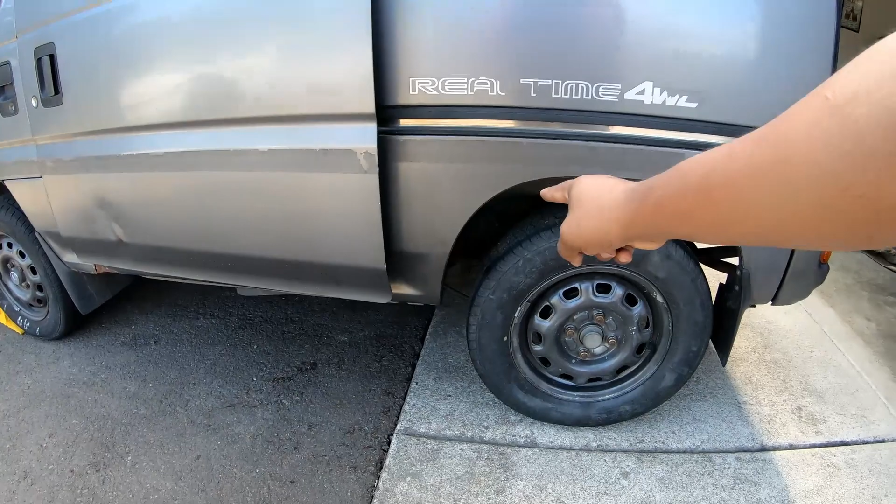A couple things I want to note before we get super far into this. The first one has to do with the working area. We're primarily going to be working in the wheel well here, and the reason that's important is that it's a tight space and lighting may not always be the best. I'm just going to ask that you guys be a little bit patient with me. I'll definitely do my best to get the best shots I can.

The second thing I want to touch on is the fact that I'm not a professional by any means. I'm just a guy who likes cars. I've done a few timing belts on other cars, but never on an Acty. So if you have any tips or tricks to do this, I would...

All right. I don't know how well that picked up on camera, but that was actually someone doing a burnout, which is kind of weird because that's really not the norm in this neighborhood. Things tend to be pretty quiet.

Anyways, though, what I'm hoping to do with this video is create a resource so other people who are doing their timing belts have something to help guide them.

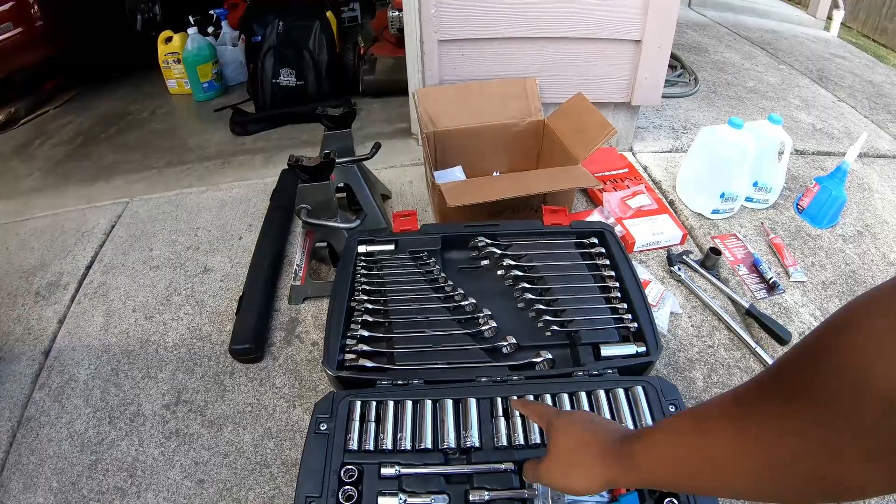We're also gonna need an assortment of different sockets and whatnot. I know we'll need the 10, 12, 15, and 17. Some of the bolts in there are probably gonna be rusted, or if someone else has done the job and they used Loctite, the bolts will be on there very tight. So I would highly recommend having an assortment of breaker bars.

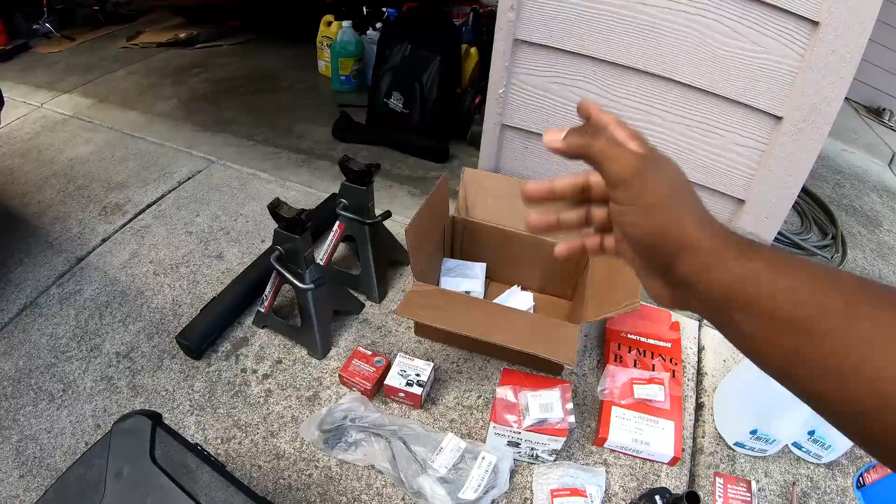Now onto the parts that you'll need. Obviously, timing belt, you'll need your water pump, the tensioner and idler bearing, I don't know which one's which, valve cover gasket, and thermostat. I bought a lot of these parts from Right Drive Parts.

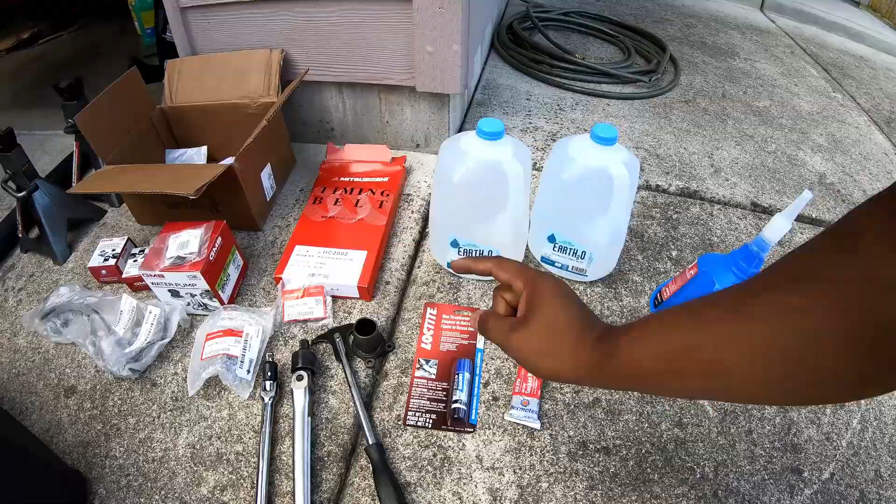I'd also recommend having some Loctite and some RTV gasket maker. You'll need some coolant, although you'll notice that I actually have some water. The reason I have water instead of coolant is that I'm going to start off by filling up the coolant system with water, and then I'm going to drain it. I'm going to do that a few times just to help get the debris out of there, because I suspect the coolant system in this car has been neglected. Once I'm satisfied with how clean the fluid is, then I'll go in and put coolant.

And if you're curious what coolant to use, I looked it up and everyone was recommending the Honda specific coolant. Lastly, you'll definitely need an adjustable funnel, because the place where you fill up the coolant is in a pretty odd place.

First thing we're going to start off with is removing the valve cover. My van's already partially stripped, so I'm just going to remove the carpets. If you have a van with the full interior, remove the carpets. I just don't know that process. The next part will be removing the little bolts. There's 4 of them. And then there's a little indent on the side, so you can lift it on up.

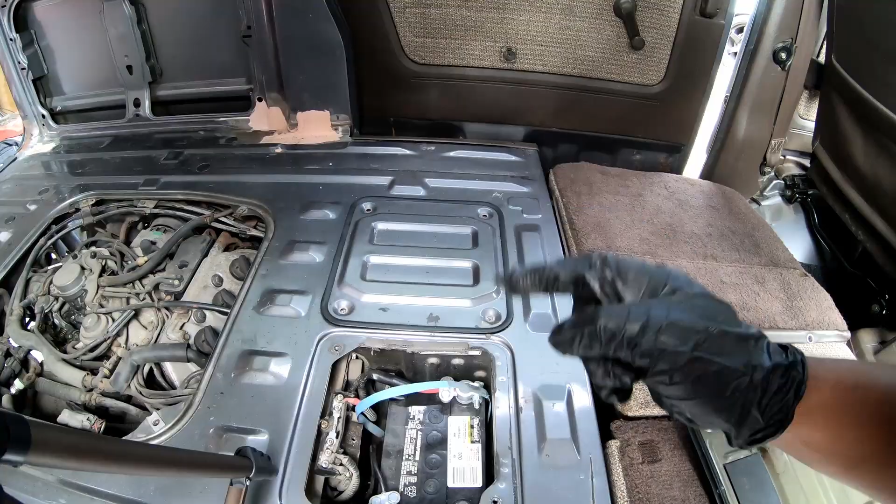Before we go any further and remove the valve cover, here's a quick reminder to disconnect your battery. To take off the valve cover, I'm going to take off these 2 bolts and remove the spark plug wires. Also, there's this little tubing that looks like it goes back to the recirculation, so some of the crankcase pressure gets put back into the intake here.

I'm not sure yet, but I think I might end up removing the throttle cable, because it's only a bolt here that I would loosen up. The reason that'd be nice is that it would give me more room to pull the valve cover off.

I'm also going to take out the spark plugs, mainly because I'm going to have to turn the engine over, and having the plugs out means there won't be any compression, and that's just going to make my life a lot easier. So something that takes a minute or 2 goes a long way.

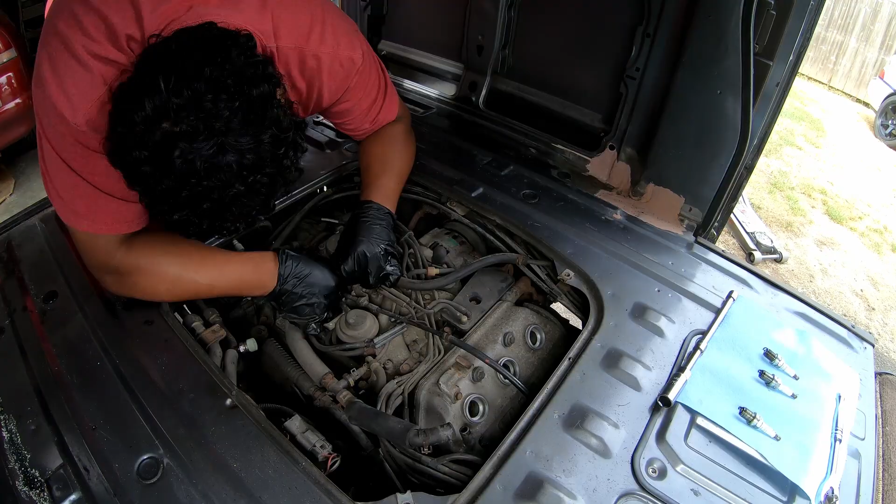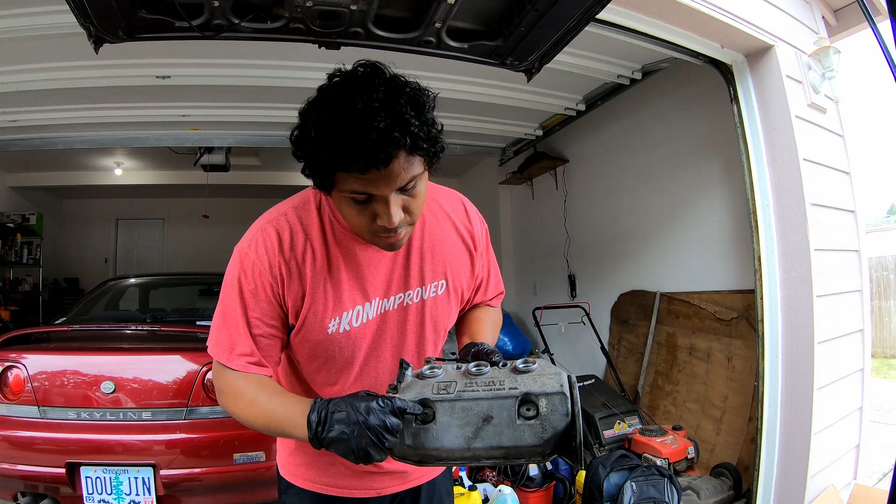Here's a better look at the valve cover. 2 top bolts right there, and these top ones are longer, and then there's 2 bolts on the bottom. The bottom ones are shorter, but the big thing is the one closer to the passenger side had a ground attached to it, so it's super important to make sure I put that back. It's a rubber gasket, which I like because they're easier to clean up.

Nothing crazy. I'll clean this up off camera, because this is a pretty straightforward thing. I'm gonna hit it with some cleaner, wipe it off, let it dry, so by the time we reassemble everything, it will be good to go. If you want to paint it, right now is a good time. I don't really care about that though. I just want this van to run.

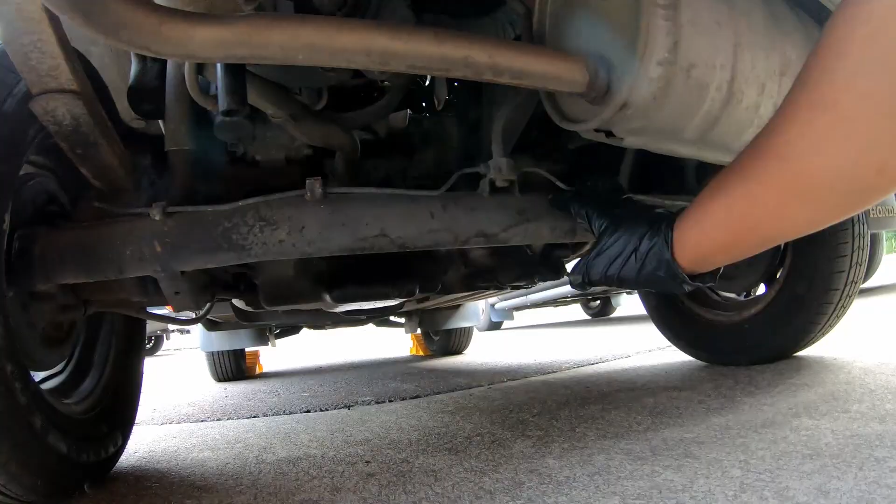The next thing we're gonna do is jack the van up. I like to jack it up from this rear bar right here, and I'll also put some jack stands there. I want to reiterate that you definitely want wheel chocks on the front so the van doesn't go sliding off. Also, to minimize the chance of dirt and debris getting into the valve train, I'm gonna close all the doors on the van. I'll put the lid back on. I think it should be okay with that.

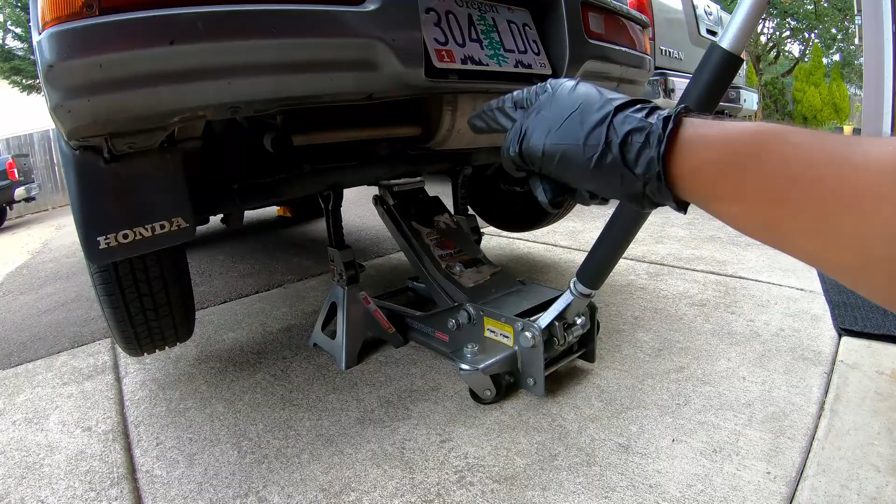Something I like to do is have the van on the jack stands, but as a precaution, I also like having the jack right under there. Let me adjust this actually. There you go. It's not really taking any weight of the van, but in case one of the jack stands fails, the jack will be there to hopefully help catch it.

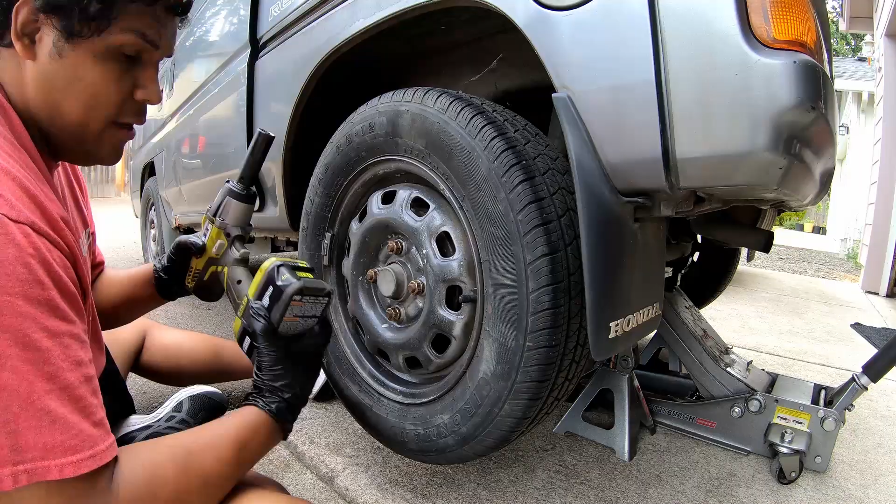If you don't have an impact gun like this, you can put the e-brake on, and that should hold it pretty well, assuming your e-brake works. If it doesn't, just break the lug nuts loose before you lift up the van.

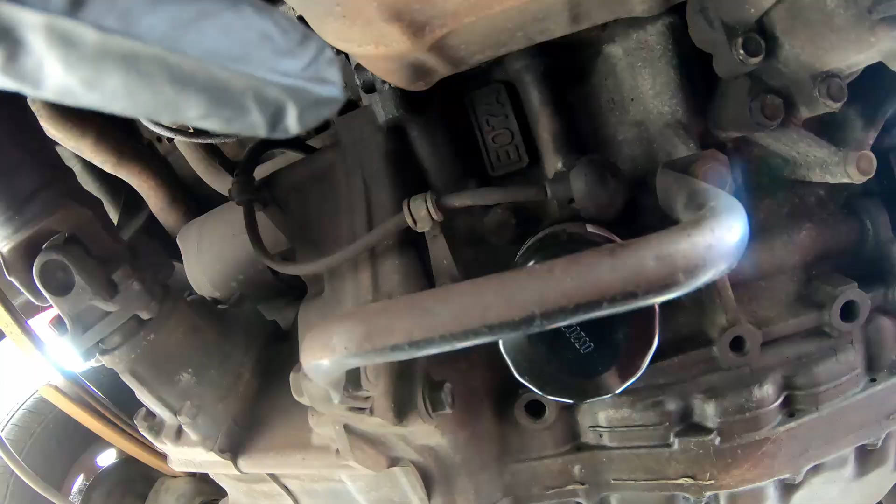It may be hard to see, but right there next to the oil filter, there is a little bolt. You undo the bolt and coolant comes out, so that way we can drain the coolant out of the engine block. And right next to it is the thermostat. There's 1, 2, and a 3rd bolt over here on this side. We're also gonna undo these bolts to get the thermostat out.

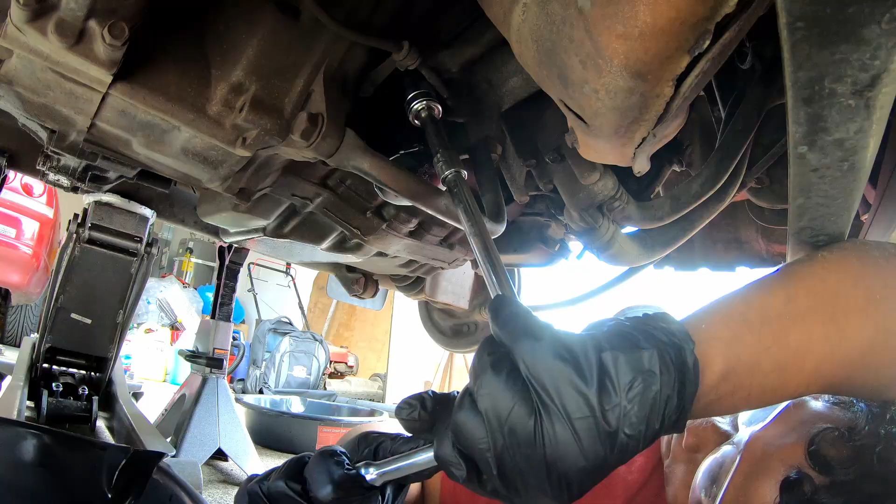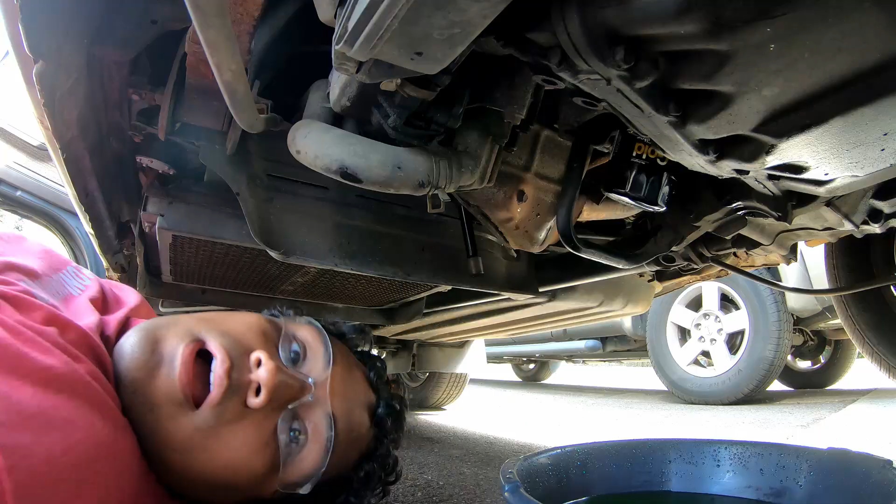I do wanna note, I have heard of people having issues taking these out. The biggest piece of advice I could give you is to back them out nice and slowly, but the biggest thing is back them out evenly. If you want that flow to go quicker, you can take off the radiator cap. I already snugged that other bolt back in because it's pretty simple to screw it back in.

Next, we're gonna undo the thermostat. Just those 3 bolts and we'll get it. I'm just breaking them loose to start, and then I'll slowly back them out at the same time. Again, I've heard from other people they had issues with bolts breaking when they untorque them unevenly.

Oh yeah, it's already starting to come out. This is why I always wear glasses. We're gonna break it loose and it's all gonna come flying out. Ooh. Man. Turning this over because we got some coolant that should be coming out of the radiator. Oh yeah, right there.

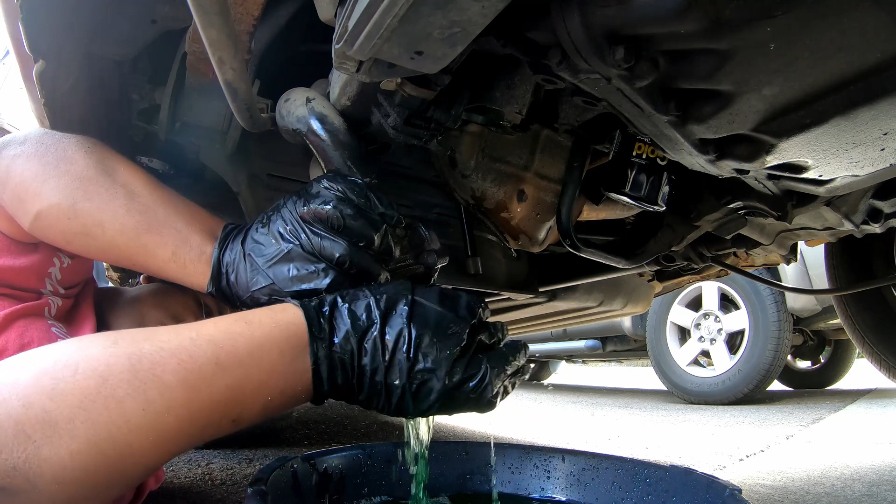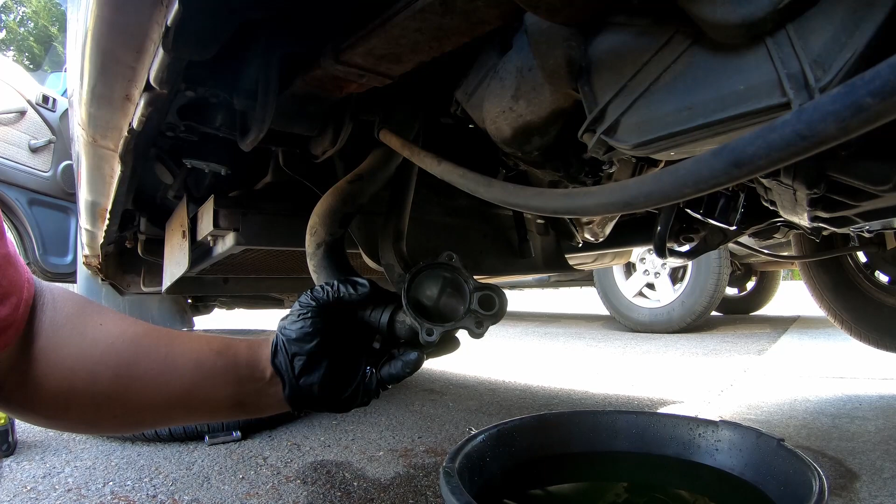Before putting the new thermostat back in, you definitely want to make sure to clean it. The van uses an O-ring, so there's not really a lot to clean in comparison to if you're using a silicone gasket.

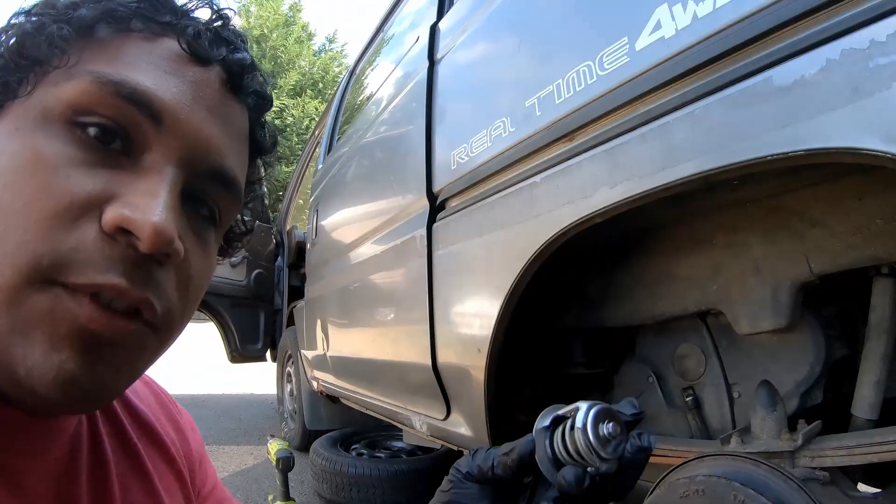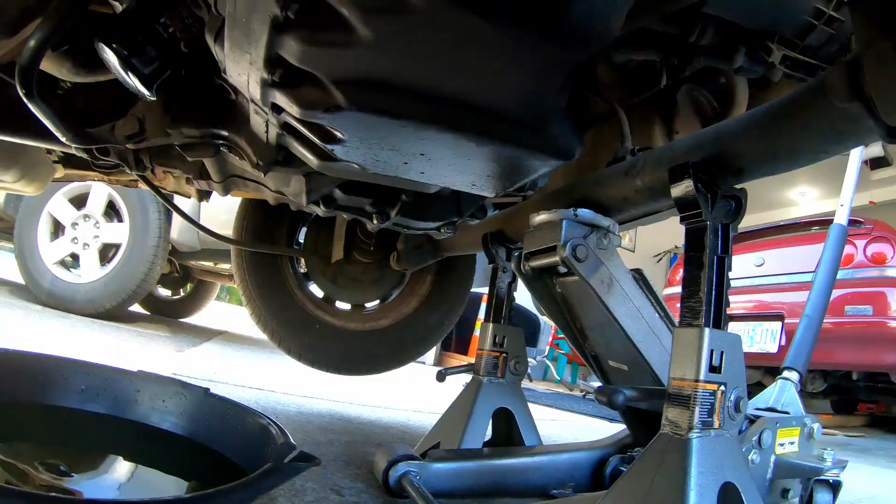Before we start taking off the covers for the timing belt and stuff, we will have to take off this little thing. This is actually the dipstick for the engine oil. We don't have to completely take it off. We have these 2 bolts here, so we'll loosen them up and then just turn the dipstick over. Of course, we will have a little oil pan there to catch some of the oil that comes out.

You do have the option of just draining out all the oil, but I recently did the oil change, so for me it'll be easier to catch the oil that came out and then just refill it with some new oil.

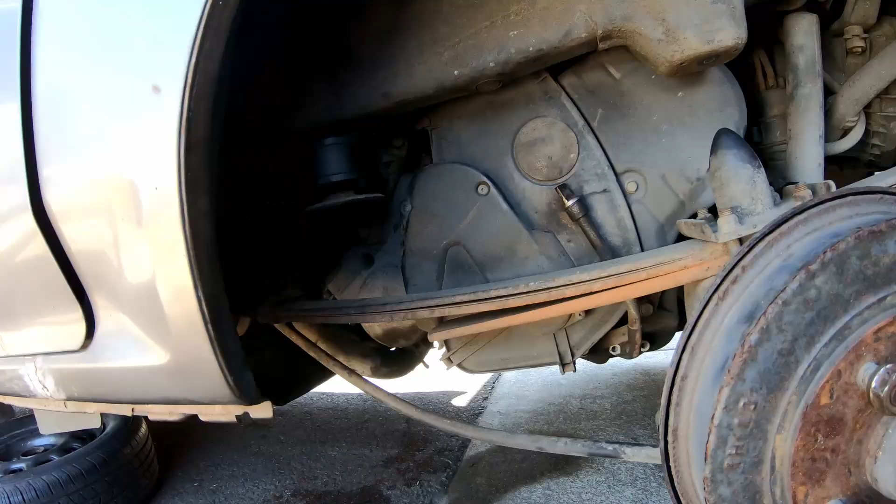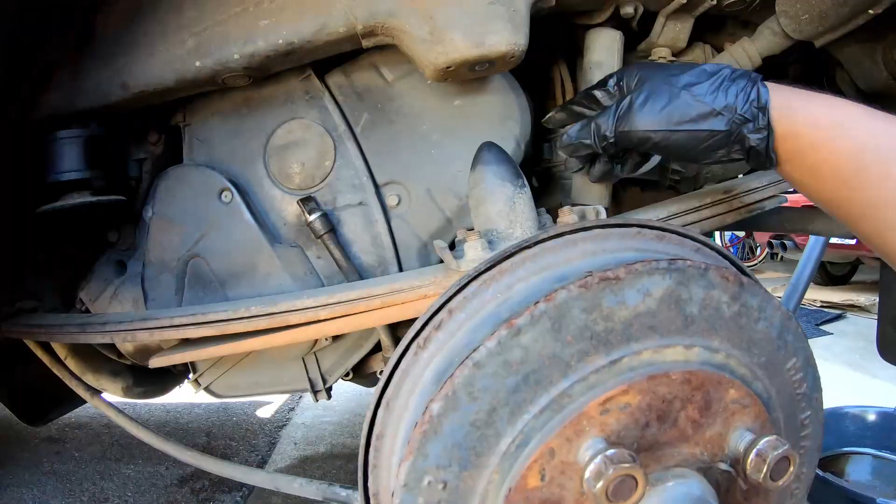Now we are to the point where we can actually start getting to the timing belt itself. We already got this loose because we'll be having to move this around. We'll start with this cover. It's a few screws. I believe it's only 3. Oh, I guess it's 4 screws. From there, we'll have access to start taking off these. And there's just random bolts. In addition to that, you have little clips like that.

Once we got all these done, we'll take off this engine mount, which we'll need to use a jack for. The owner's manual says that you can just use a jack and jack it up by the oil pan. Just to be safe, I like to use a piece of wood that helps disperse the load. After that engine mount, it should be pretty close, and then just take off this bottom cover. Quick thing though, this is one of those times where it will be helpful to have that breaker bar, because I know the first time I took off this engine mount here, that was a huge pain.

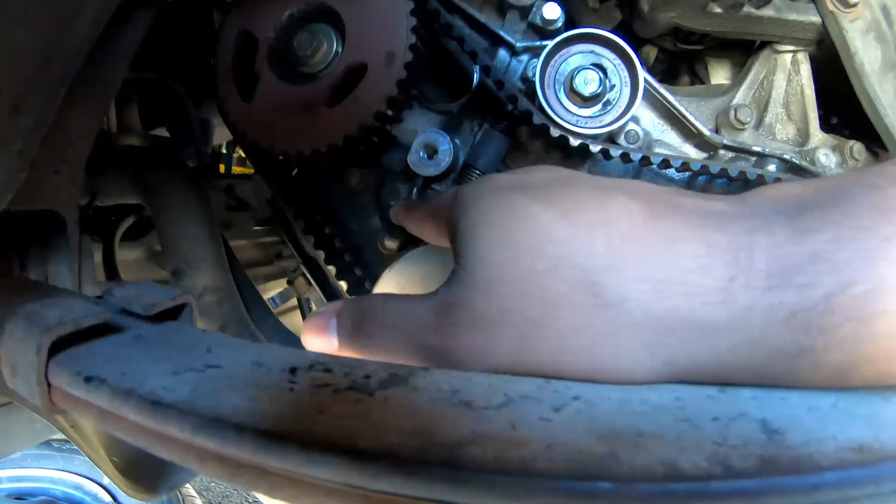Well, everyone, it's actually the next day. I ended up walking away because I got very frustrated, and I know when I'm frustrated, I don't work well. Now, I'll show you what irritated me. If you look right here, you're gonna see a bolt that is rusted and a little bit deformed because of that. If you look right above there, you're gonna see a bolt that was rusted, but now it had the head chopped off. I will be honest with you guys, this is not my proudest work, but it's what I did, so I might as well be transparent. And for anyone watching this, just know if you get mad, walk away.

What ended up happening was I tried using an extractor socket, that didn't work. I tried hammering a socket in, that didn't work. I was then gonna drill it out. I started drilling it out, and my drill decided it didn't want to work anymore. So I got very angry and I just said screw it, and I got the Dremel and I chopped the head off so I could get the cover off.

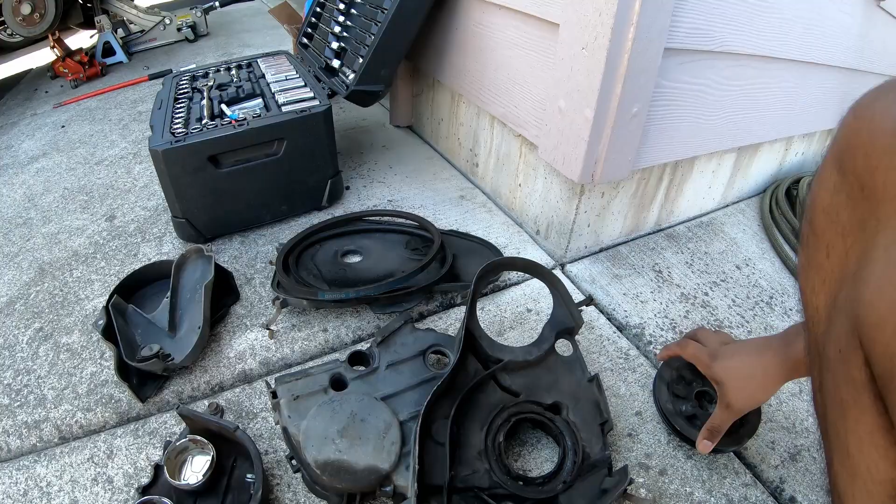Doing that did cause some damage, but I didn't really care because as you can see here, it looks like a belt was hitting it and rubbing through. So it's already messed up, but the other thing is it's actually cracked. If you noticed, I did not cut that second bolt. The reason is pretty simple. This area was already cracked. Prior to me doing the timing belt, when someone else serviced it, they cracked that. And then right here is the damage I did getting it out. So it's not the prettiest, but for the most part, the timing belt itself will be covered and safe.

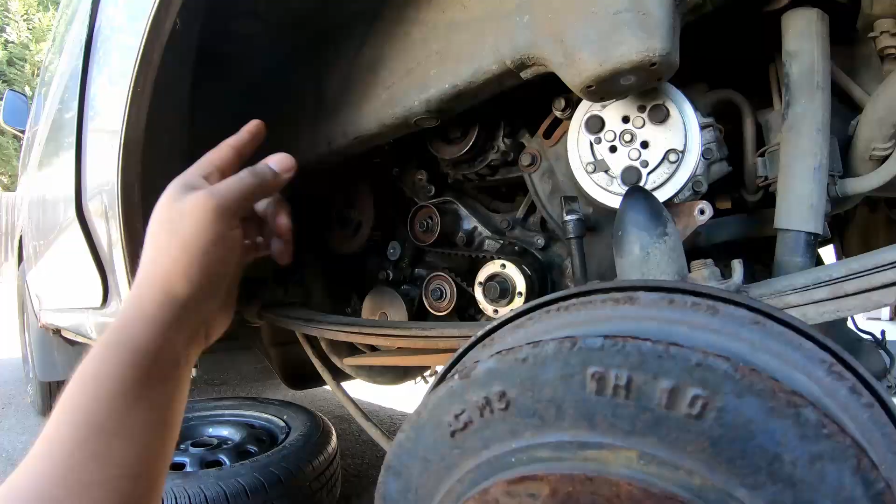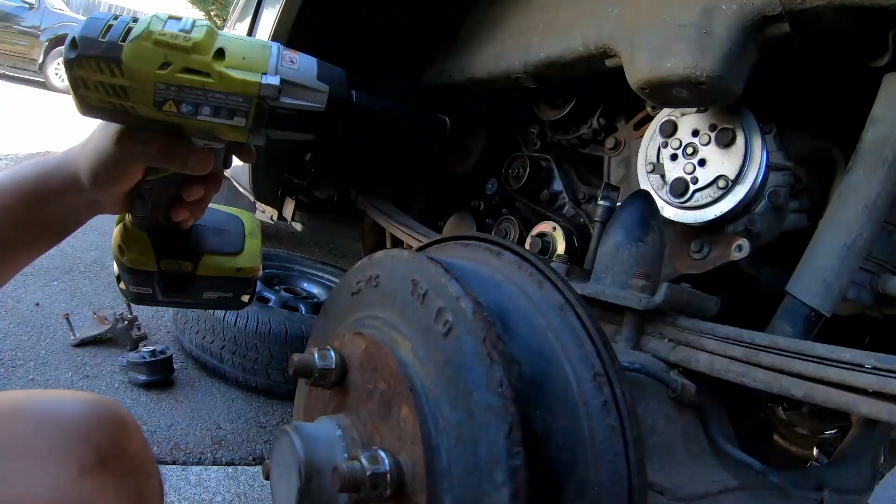Now that we got this out of the way, we're gonna get on to how you remove the bolt for the crankshaft. The way I did it was I used this, but it didn't actually work initially. The battery on my electric impact gun was low, so when I tried taking it off, it didn't work. But I charged it up and put it in, and then it just came off on its own. There you go.

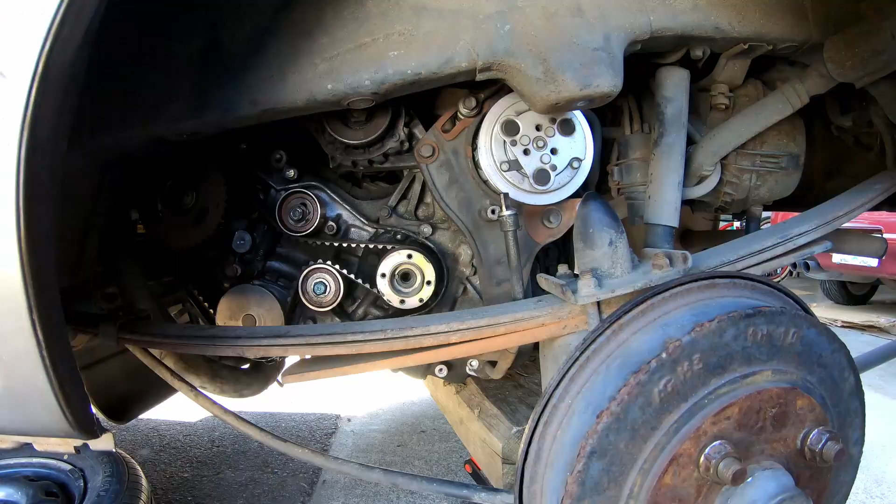And it's stuck. There is a special tool that you could use to get this off. So essentially it goes over and then you put the 4 bolts back in, and that will allow you to hold the crankshaft in place as you take off the crankshaft bolt.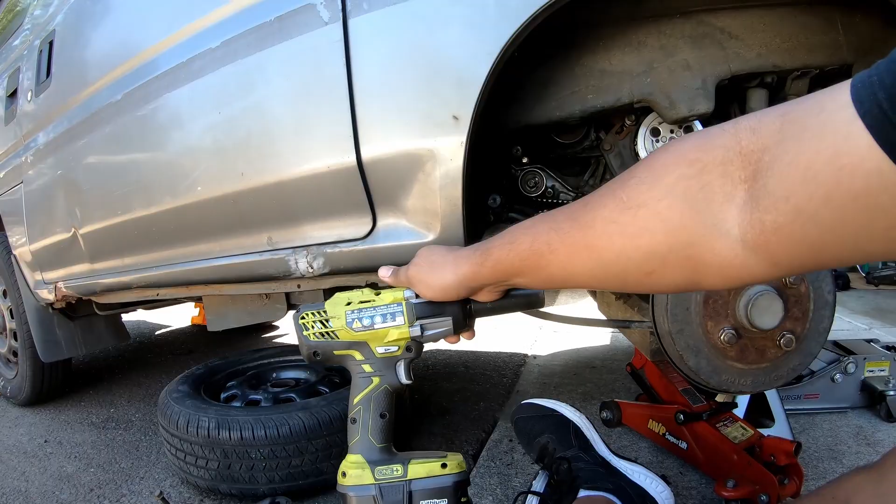But honestly, I think the easiest method is get a decent impact gun. I got this one as a birthday gift, but honestly, they're not super expensive. And this is one of the cheaper ones. So if you're looking for a cheap one, definitely go with this.

As we pull off the pulley, be careful because there is a little key there that helps everything stay in place. It's super easy to lose this, so just be very, very careful. I will be super honest, I'm a little bit confused because there's no markings. Well, I did mess up a little bit because I didn't set all the markings up before I took off this bolt, but what I did instead was I just spun it over here at the crankshaft.

Right here is actually the line up mark, so there's an arrow that you're gonna see right there. I actually didn't see it initially because it was dirty, but I cleaned everything off right there. You can see a little arrow. You want those lined up before you take off the pulley though, if you want to line everything up to make it easier on yourself.

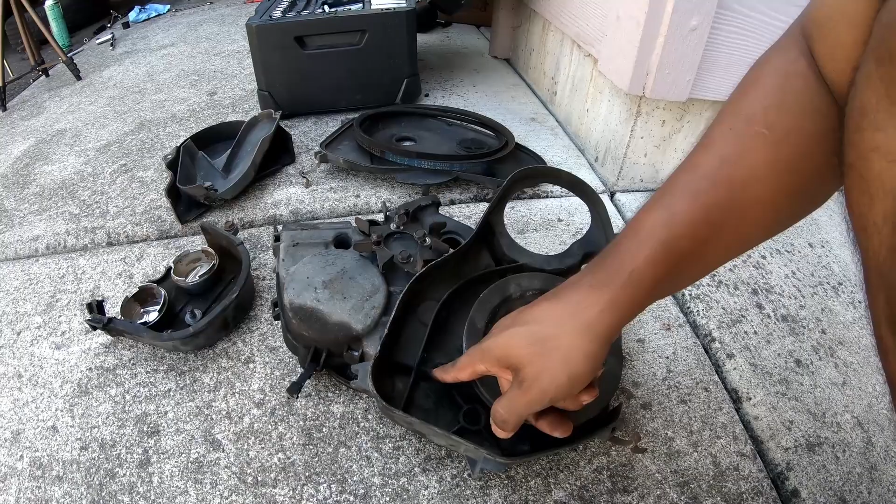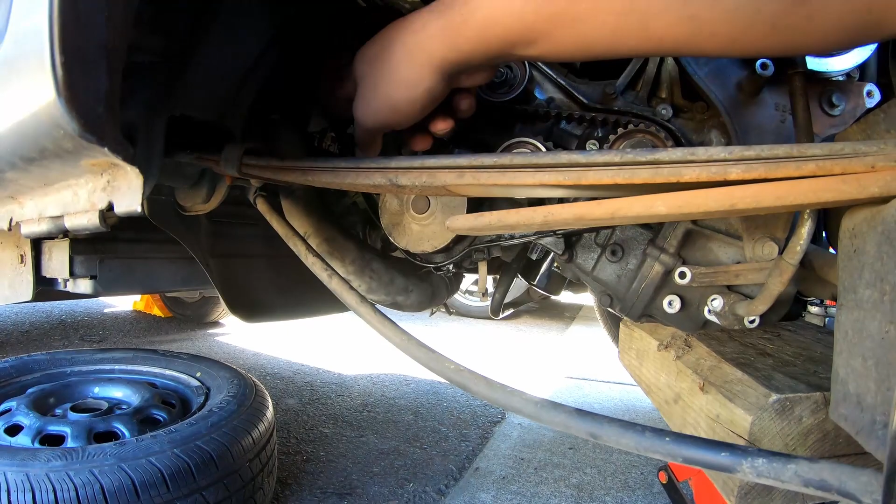I didn't know this, but I just looked in the manual, and so right here is the pulley. There's actually a little indent right there, and then right here is the mark that says it's at top dead center, so that lets you know. But getting back to this over here, you want to line up those, and then over there you're going to want the up at the top, and then there's 2 more markings, and I'll show you those real quick in the manual. The reason I say that is that it's really really hard to see it.

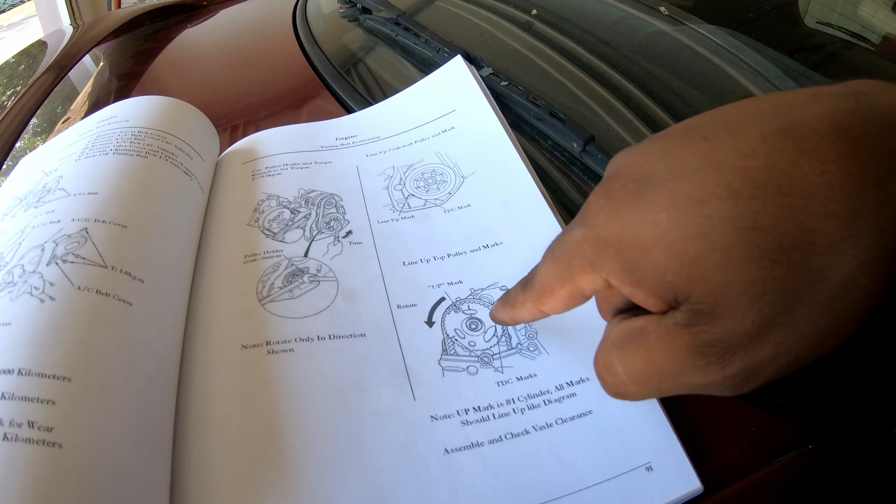So for the camshaft, you want the up at the very top, and then there's these two little markings. You want those lined up with the head. To make my life easier, I'm actually gonna mark those with a Sharpie. That way they stand out a little bit more and it makes it easy, but I still have to do the water pump, the bearing here, and then the tensioner. But before I take that all apart, I want this roughly where it should be.

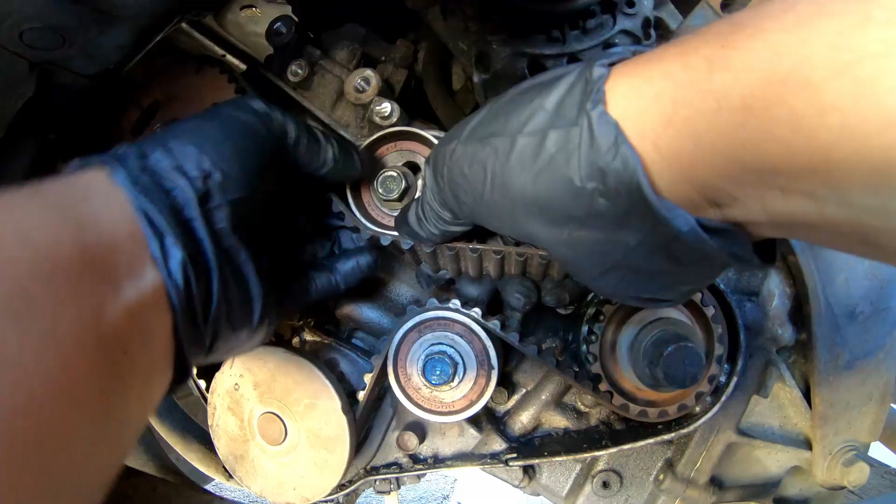My biggest concern, and something that I'm just very cautious of more than anything, is that I don't want these things super out of line, because the engine is an interference engine and I do not want the valves bending. So it's just about being cautious more than anything. I am definitely glad I decided to change the belt, because as you can see under there, it's actually cracking. So definitely on the older side, and it was time to change it.

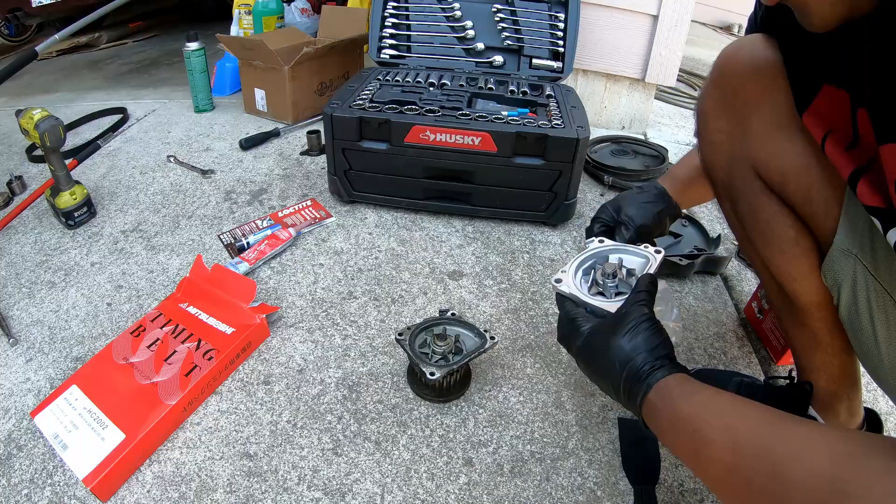It's always a good thing just to put the old part and new part side by side, just to make sure they're gonna fit, because on the van I noticed is that they have little indentations to help guide it and make sure that this is in like the right position. Putting them side by side, everything seems to match up perfectly fine. Yeah, that's a pretty drastic difference though.

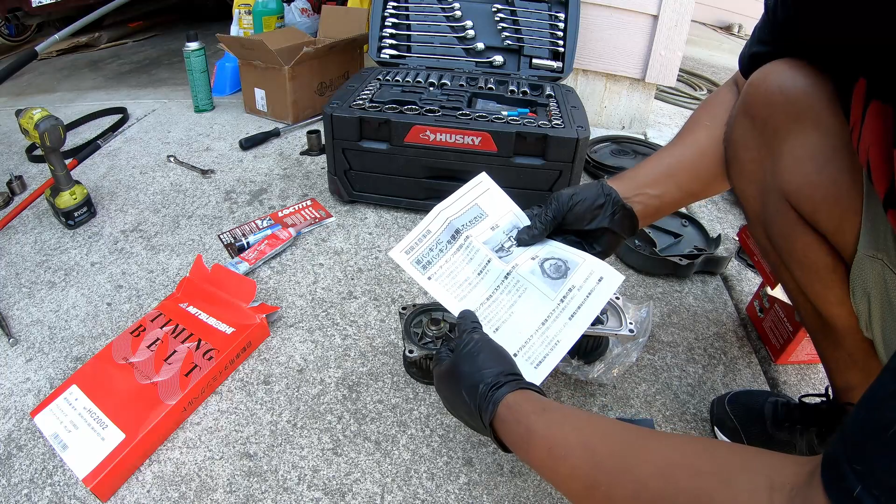Here's actually the pamphlet that came with the new water pump, which I thought was pretty cool. But the bigger thing is this. They have these funny little cartoons. I don't know what they mean, but that makes me laugh.

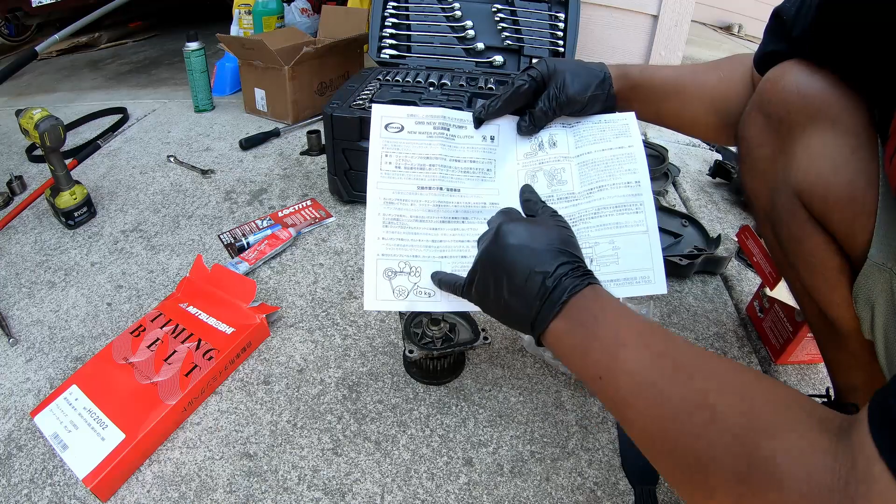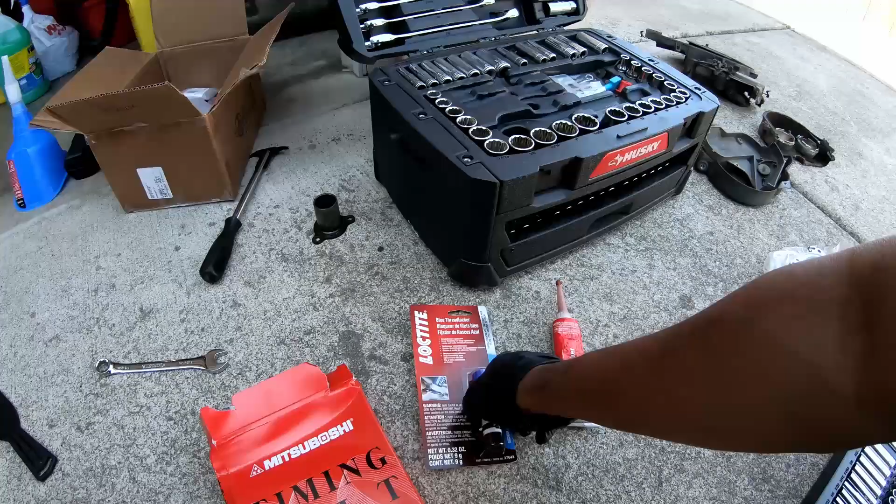Before I put the new water pump in, I just wanted to mention that some of this stuff won't come off by just wiping it off. And if that's the case, you can get like a plastic spatula like this, and you could use it to scrape. The reason I like plastic is because this is less likely to scratch the surface of metal. I didn't show it on camera, but I got everything cleaned up. I mean, it's cleaning stuff. That's pretty self-explanatory. Now, as I start reassembling stuff, the biggest piece of advice I can give is use a Loctite. That way nothing backs out.

Hey kitty. For those who have never watched my channel before, that is Stitch. He's actually the neighbor's cat, and he is easily the best cat ever. Hey little guy, he loves attention, always lets us pet him. He even lets me carry him. Oh, he is such a good cat. I gotta go back to work, Stitch. I'll see you later. He always comes and hangs out with me as I work on the cars.

Another thing I'll say is that the torque wrench I have is actually massive. It's a big one, so it's not really gonna work for what I'm doing in terms of torquing down the water pump here, because the bolts are super tiny. So what I'm gonna do instead is I'm gonna use a smaller socket. That way I can still tighten it down, but I'm not really worried about over tightening it, and I'll kind of just eyeball it, if that makes sense.

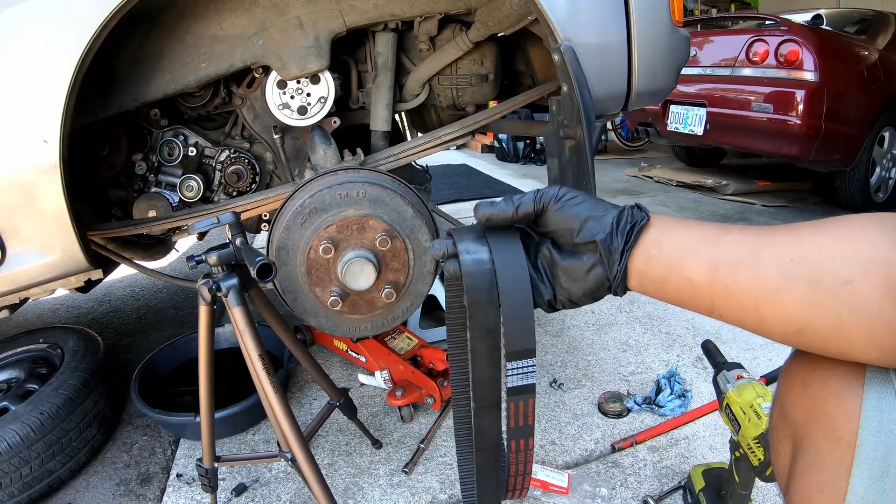Well, now we are on to the last point, and that's just putting the timing belt on. As always, I like to compare the old part and new part right before putting it on. Ideally, you would compare the parts before taking everything apart, but given the circumstance, I can't really do that here. They look like they're pretty much the same. They're identical lengths, which is good.

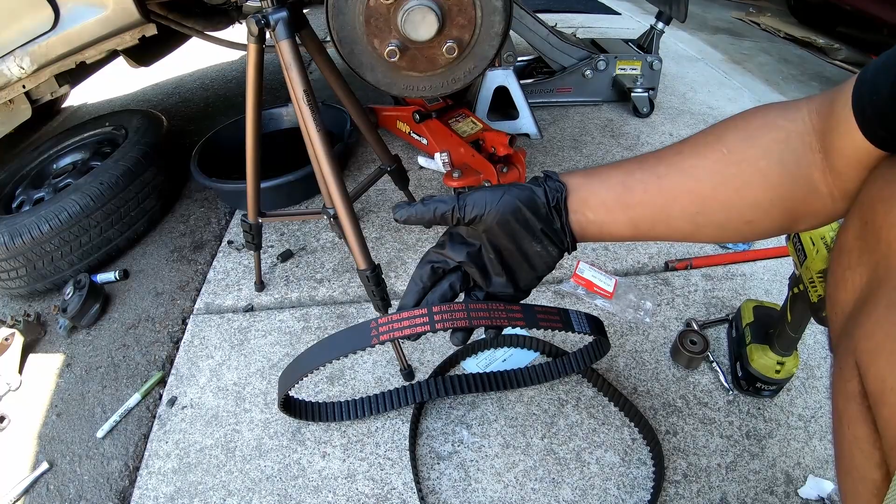And I'm not very familiar with this brand, but a lot of people on the Acty forum groups said that it's a very, very good brand, so I'm happy about that. I'm used to Toyotas, so I don't really know other brands outside of that.

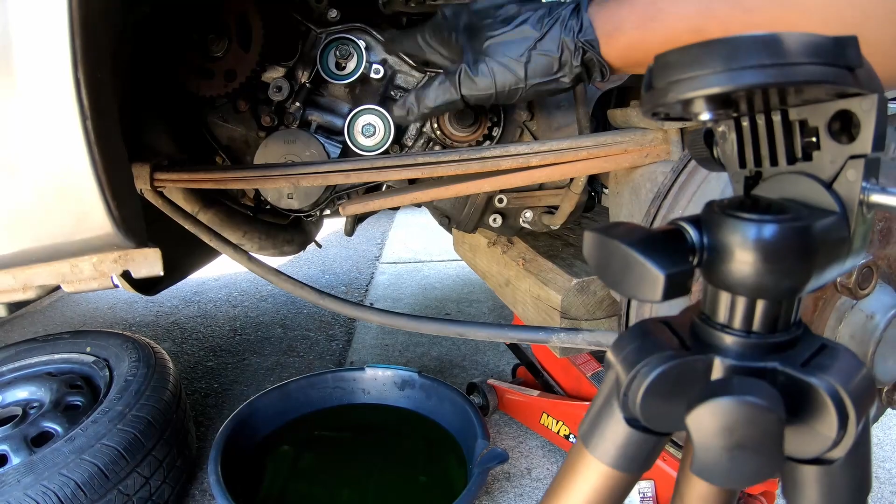When it comes to putting the timing belt on, obviously we want the marks to line up, and this mark is almost there, very close. Same thing with that. So when I'm putting the timing belt on, the way I'll do it is I'll have this mark lined up. I'm then going to wrap the belt around here. I'm going to bring it over the idler bearing, come around the water pump, come around the camshaft, and then from there I'm going to have it come under the tensioner and wrap back around.

All right, this will be a little bit of trial and error. Even though I have them lined up, I wouldn't be surprised if I do this and then I'm a tooth off, but that's why you triple check everything, especially on an interference engine. And take your time. This can be a frustrating process. If you find yourself getting mad, walk away and come back to it. The nice thing about this setup though is that it's super simple. It's not like we're dealing with a dual overhead cam engine or some other really crazy obscure setup.

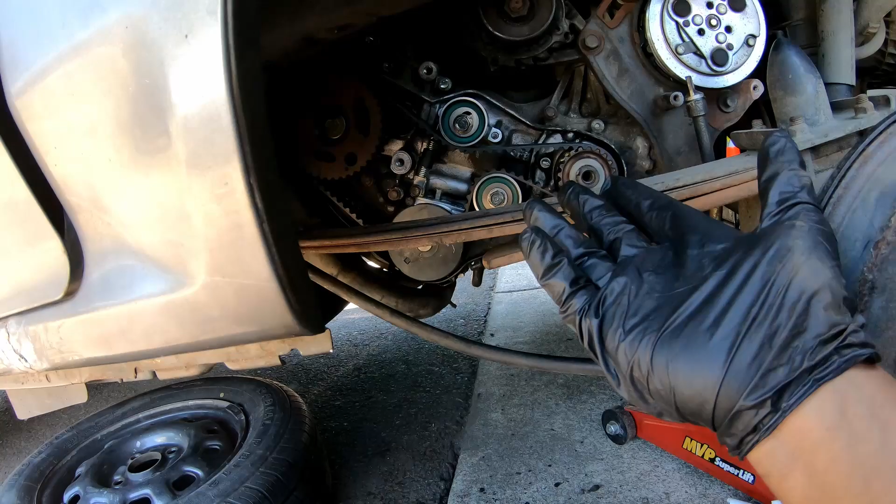Well guys, I just wanted to show you what I was talking about and that it can take a couple of tries. So this is my first attempt here, and it's actually really close. Those cam marks are lined up perfectly, but these ones right here are off by like half a tooth. So I'm gonna have to take it off, do some minor finagling, and I'll probably get it after a few tries.

I got everything lined up. It did take me a little bit just trying to figure out the exact trick. So what helped me the most is to get all the slack that I potentially could out of here.

I feel fairly confident that the timing is all lined up, but just to be safe, what I'm going to do is put the valve cover back on, and then I'm going to turn the car over and see if she runs. I'm pretty much just going to start it and let it run for a good 15-30 seconds. The goal is just to make sure that it does run and everything's good. I am actually very, very anxious for this, so we will see. Neutral. Pump.

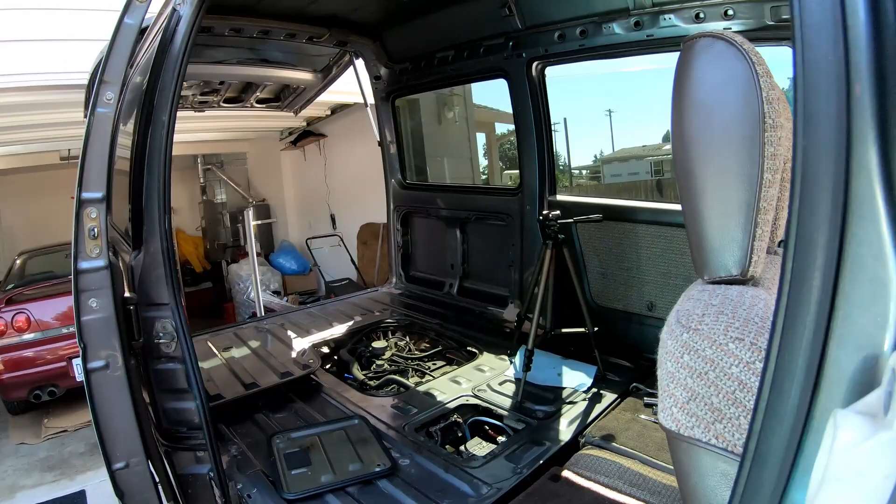Oh, she starts. She starts. Oh my god. Oh my god. Holy shit. That's such a relief, guys. I'm actually gonna turn it off now. No, she runs. Holy shit. That's a good feeling.

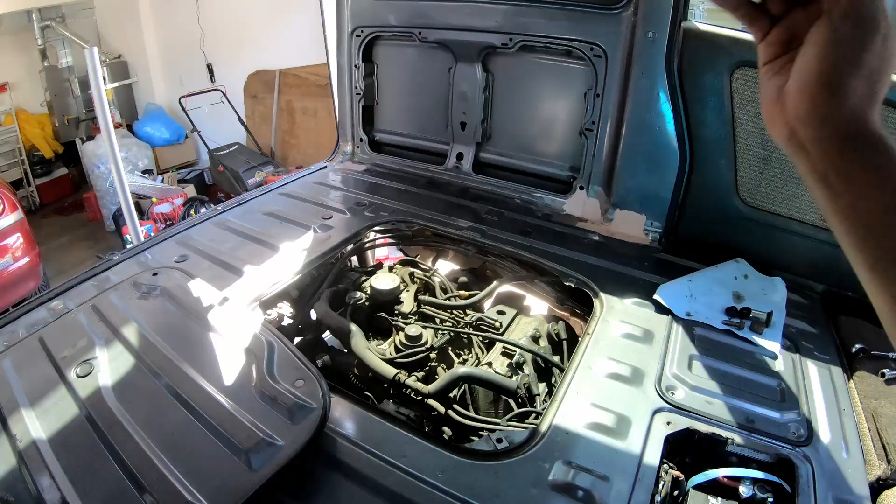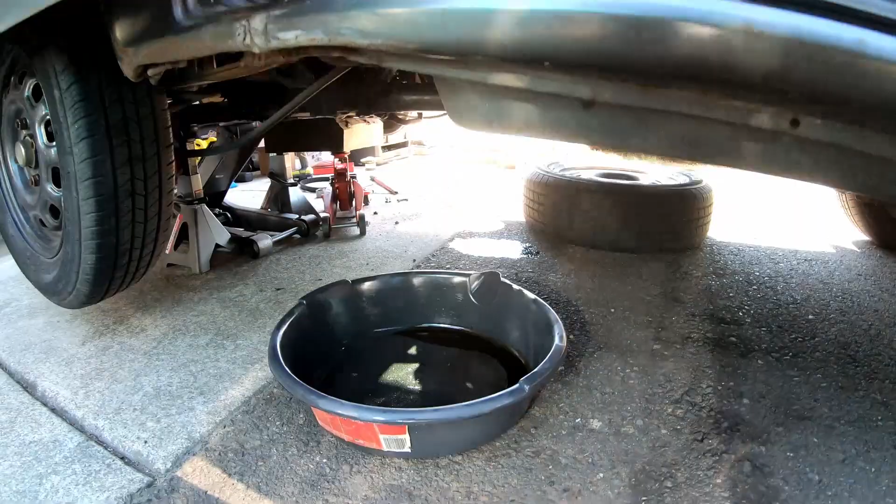Well, everyone, do not make the same mistake that I did. Everything went really good for the test startup, besides one little thing. On the valve cover, look what's over here. I totally spaced putting these two bolts in on the back side. And why is that important? Well, I noticed something dripping under there. That is oil coming from the valve cover that just got all over the exhaust because I didn't tighten it well.

I'll tell you what though, that is a really minor thing. All I'll have to do is get some kitty litter, clean that up, not a big deal. But yeah, I'm gonna take the valve cover back off and we'll start the process of putting the timing belt covers on.

I messed up pretty bad. I accidentally threw away the valve cover gasket that was new. The reason that's important is that I already threw away the old valve cover gasket. So I have the valve covers, but no gasket. I can't run the van without it because then I'm just gonna spill oil everywhere.

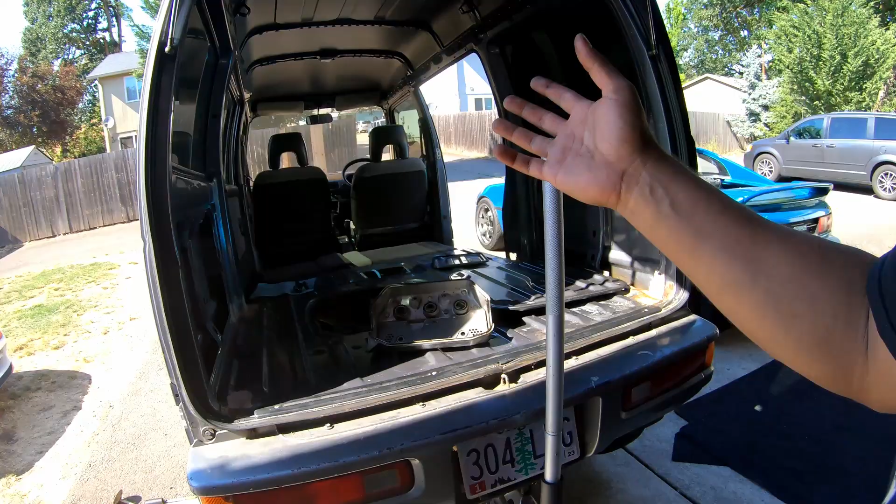This sucks. Luckily, it's not too big of a deal, but I guess I'll just have to get another valve cover gasket. So essentially what that means is that we can't finish up the timing belt today, which sucks. But on a positive note, I feel like I can at least talk you guys through the last little bit. So pretty much the big things that are left are to put the belts back on.

I'm actually not going to do that today because I don't want to do double the work, because these accessory belts are actually very bad. They're super worn and cracked.

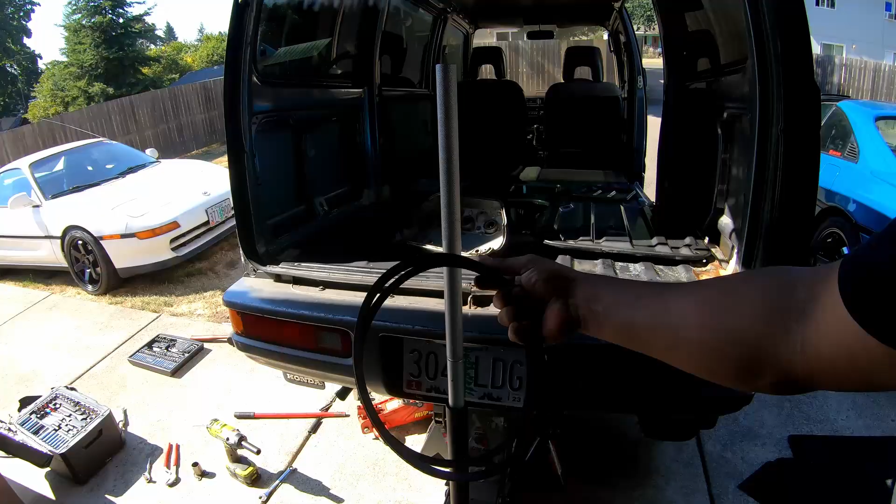Anyways, if you're looking to tighten up the belt for the compressor, what you're going to need to do is loosen this one up, and then on this side of the bracket, it's hard to see, but there is a nut. So that nut, you use that to adjust the tension, and then you tighten this up to lock it in place. Right here's the alternator. So you have this bolt that you'll loosen up to allow it to swing up and down. Once you got the tension exactly where you want it, you'll just lock it in place right there.

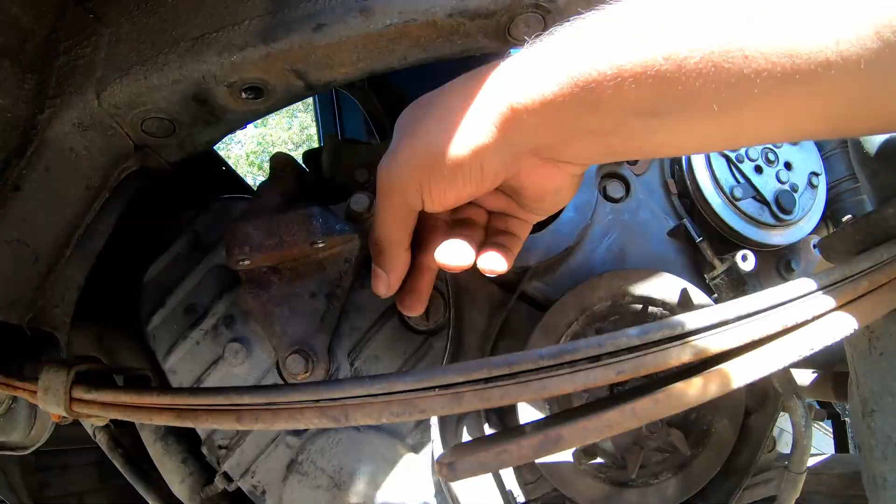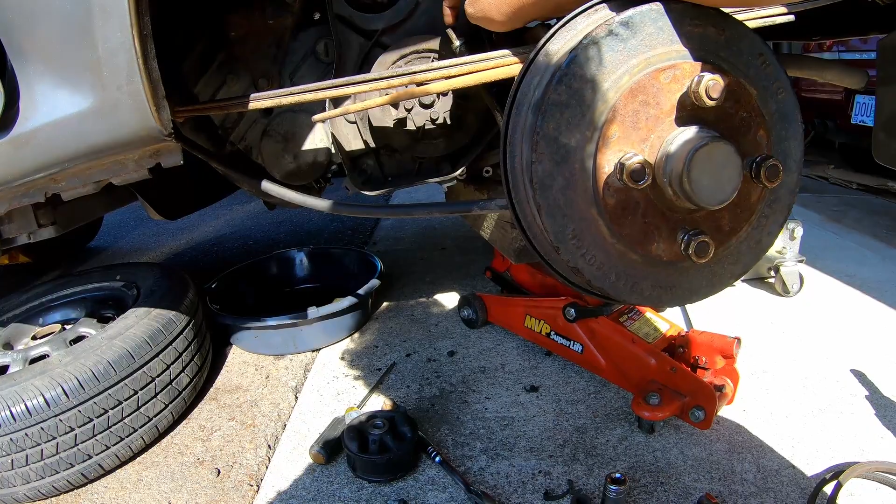Once you put the belts on, you would come over here, grab these covers, you would put them back on. You would then put the side engine mount. You would need to remember to bolt the oil dipstick back in place. Well, we're pretty much at the home stretch, so we're gonna put the valve cover on. Even though I don't have the gasket, I still want to have it on there so that I can help minimize the chance of something getting into the valve train.

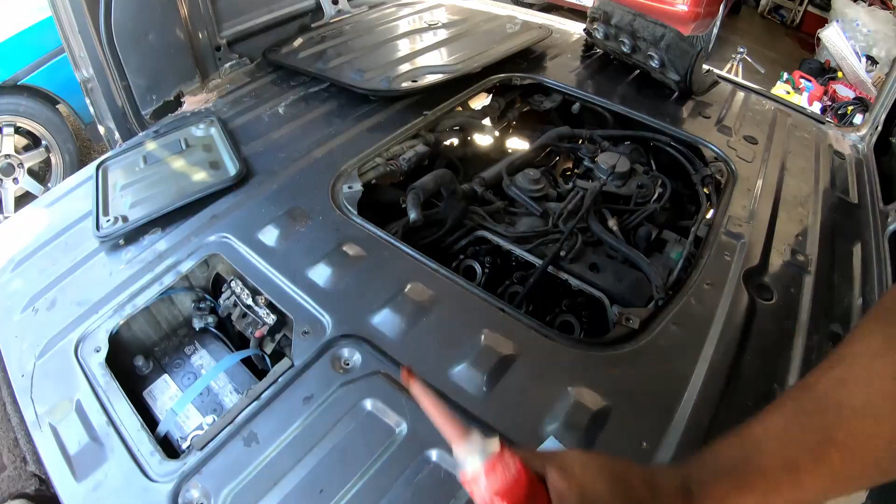Earlier in the video, I did mention you want to have some gasket maker, and the reason you want to do that is right there in the corner. I hope that shows up pretty okay on camera. But anyways, here in these corners, oil tends to seep at the valve covers, and it's not like a Honda Acty thing. It's pretty much every car that I've ever seen.

So to help prevent that, you get a little bit of gasket maker, you put just a small dab right there, and then you let it dry and you're good to go. Just be conscientious of what gasket maker you use, because this one takes 24 hours to dry. Other ones are quick dry, so you can have it ready to go in an hour.

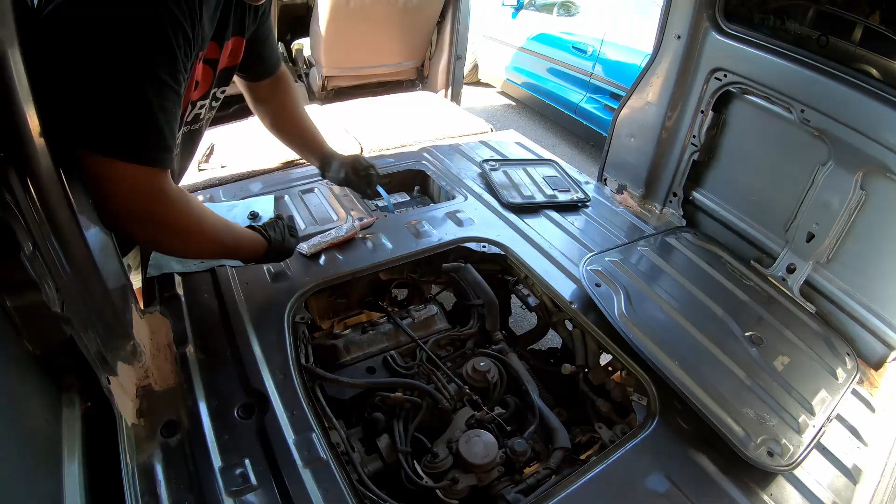All right, just as a little reminder for these back bolts on the valve cover, the one that's closest to the wheel well on the passenger side, there is a ground that you want to make sure you put back in, because if you don't have your grounds, that can cause a fire.

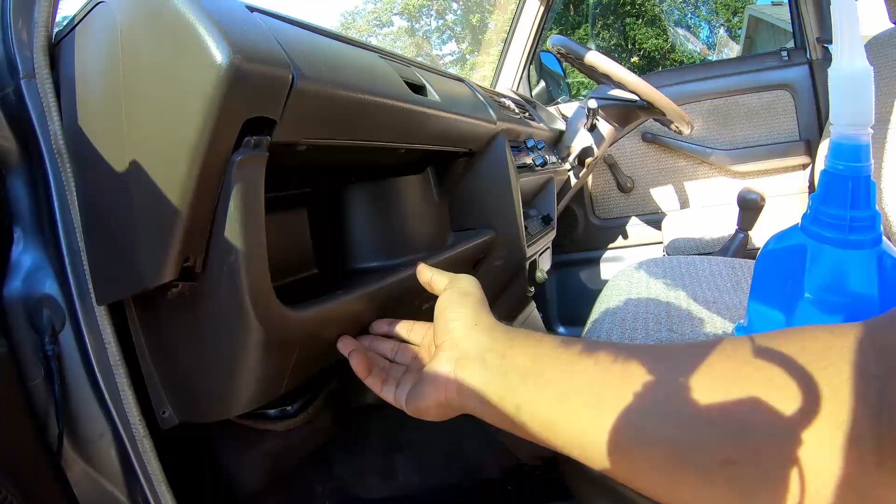Now the very last part of this whole process would be filling up the cooling system with coolant and then bleeding the coolant system. I know a lot of people have issues with bleeding it, or at least filling up the filler neck, because this is in the way. I can't really speak for everyone, but this is actually broken on my van, so I don't have to worry about that. We're here on the passenger side wheel well, so normally it would look like this.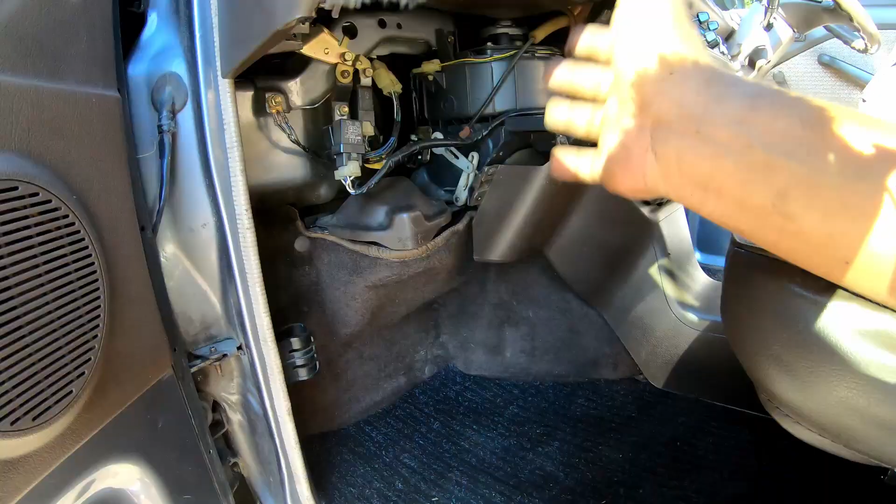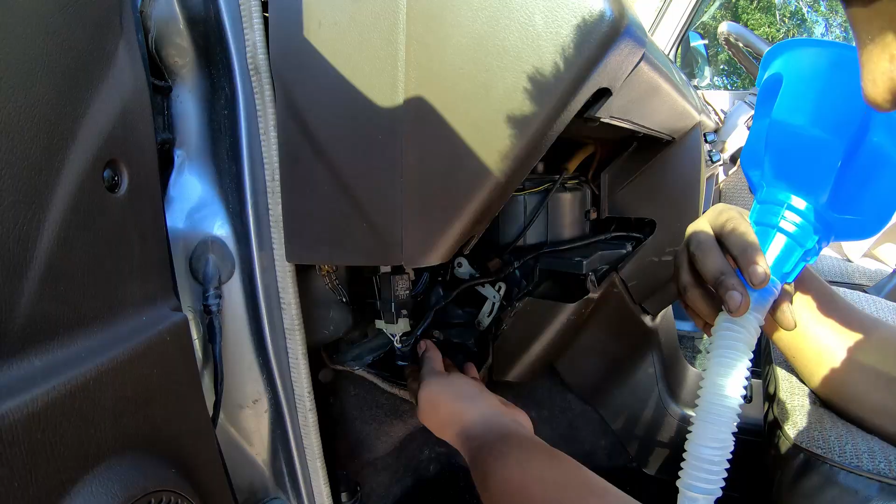You come over here, you take off the cap, undo this little bolt, you take this off, and then you'll take off the radiator cap. Of course, make sure it's cool, because if the van or truck is hot, that's not a good time. When you fill the system up with coolant, you're gonna want some type of adjustable funnel, because this is honestly at a really weird angle and it's a little bit odd. So if you tried it without the funnel, you will definitely spill fluid everywhere.

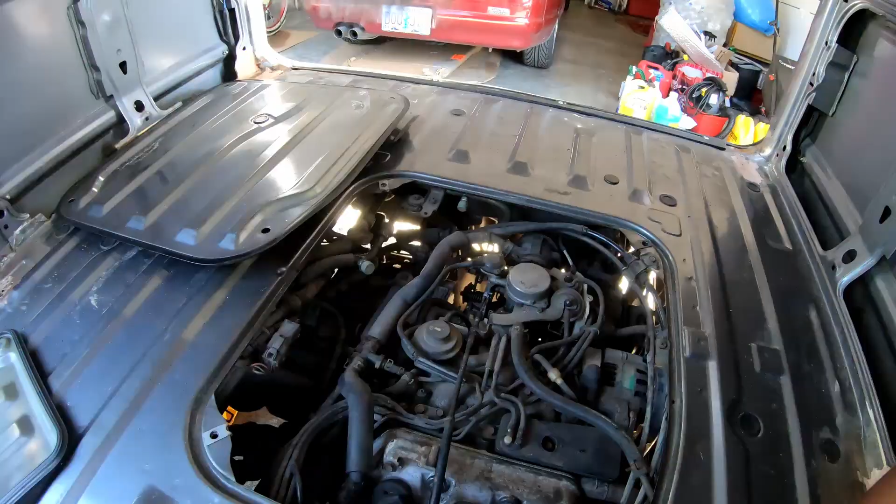Once you got that filled up with fluid, turn on the vehicle. Make sure you leave that cap off. Then we'll come over to the engine, and if you look right there, and then right over here, there's two bleeder valves. That's to help bleed out the air from the coolant system. So you'll want to crack those open. There is two more right above the spare tire.

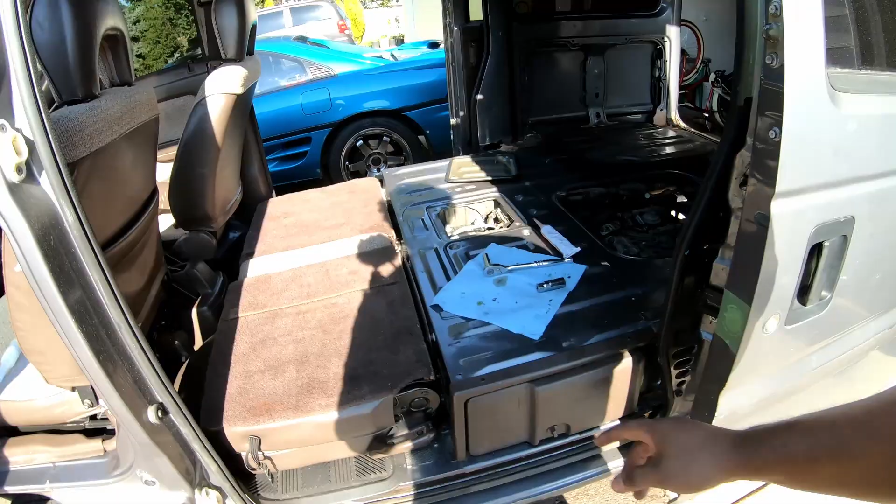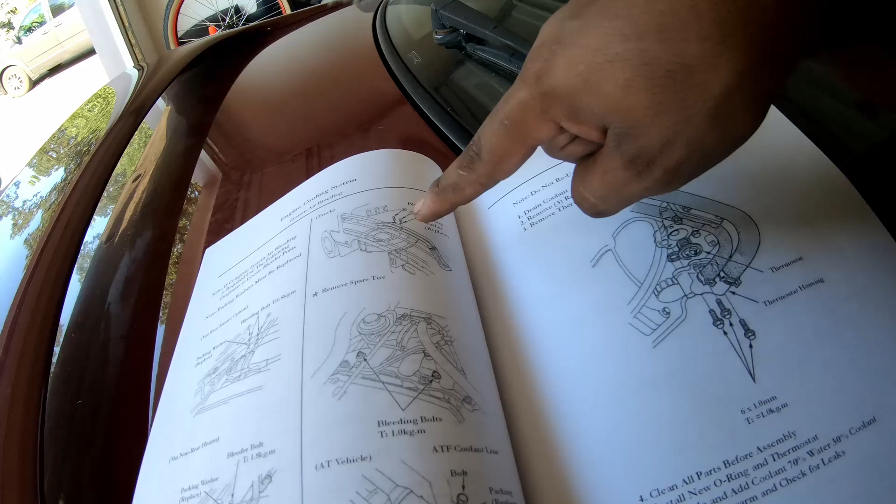I'll tell you right now, the shot that I'd be able to get is bad, so I'll go over to the owner's manual. Here's a shot in the owner's manual. So you can see right there's the spare tire. You'll have to remove that, and then there is two bleeder bolts right there. Also, if you have an automatic, you'll have an additional one over by the engine right above the starter.

Also, as you're bleeding the system, you're gonna want to turn the heater all the way up, and that way the fluid that's in the heater core can also get circulated through. Well, everyone, that's how you change the timing belt on a Honda Acty. I do apologize, the last little bit I really wasn't able to show you guys. I just talked about it, but I still hope that was very helpful.